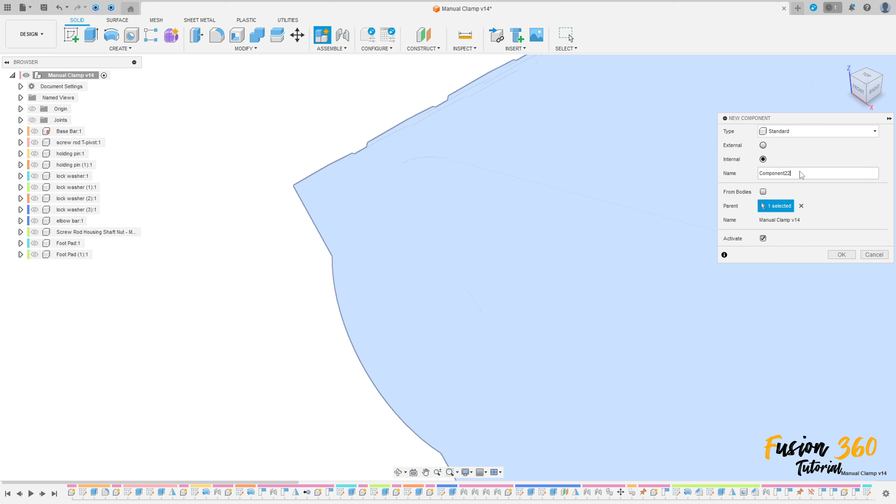Go to assembly, select the new component, rename this to screw rod, press OK.

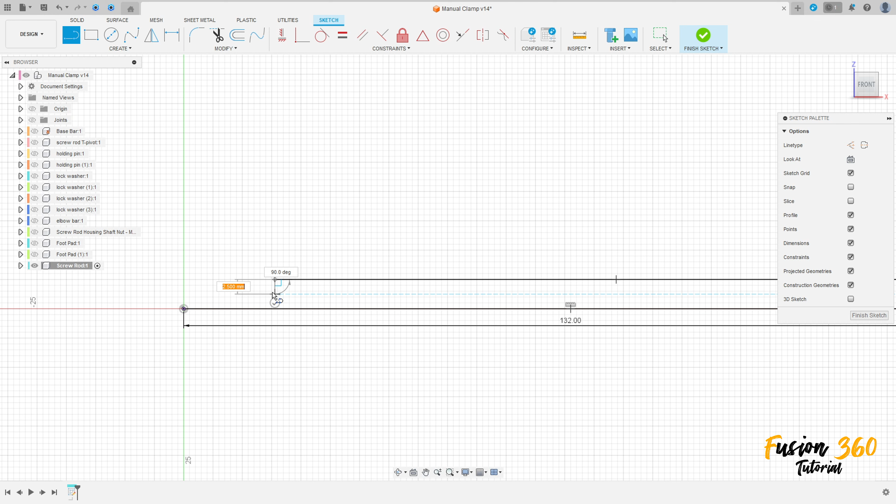Go to create a sketch, select the front plane, select line, make a line here 132 millimeters. Make another line here with 5 millimeters. Make this sketch here.

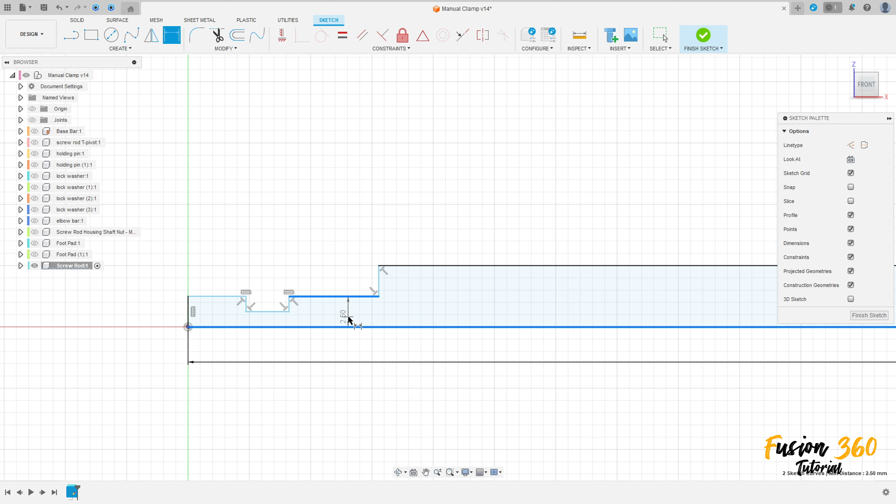Make this line vertical, make this point vertical. Go to sketch dimension. The distance here is 3 millimeters, the distance here is 1 millimeter, the distance between these 2 points here is 15 millimeters, and the distance between these 2 points here is 3 millimeters. And the distance here is 0.5 millimeters.

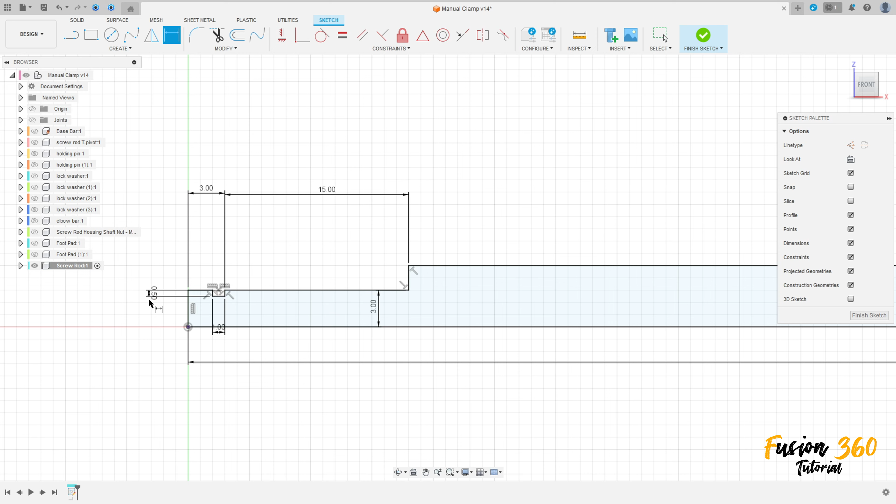We have this. Finish the sketch, go to revolve features. The axis is this line here.

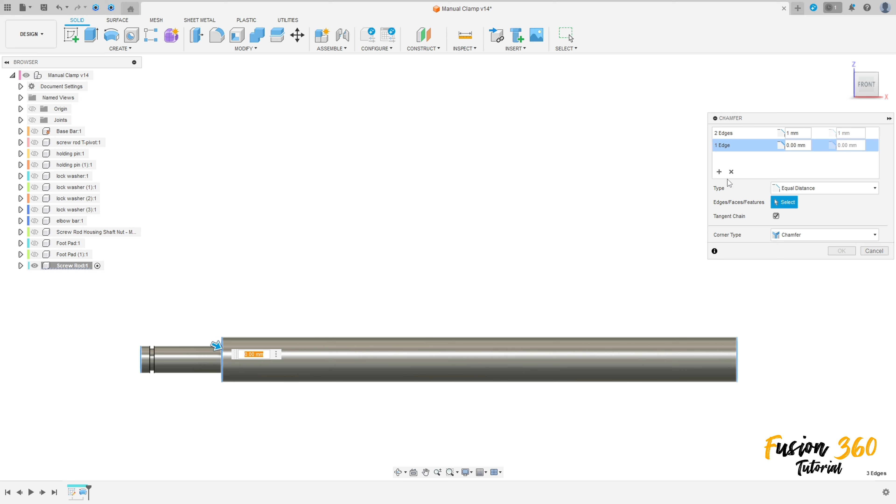Press OK. Go to modify, select the chamfer, select this edge here and this edge here. The chamfer here is 1 millimeter, equal distance. Go to add selection set, select this edge here. The chamfer here is 0.5 millimeters and press OK. We have this.

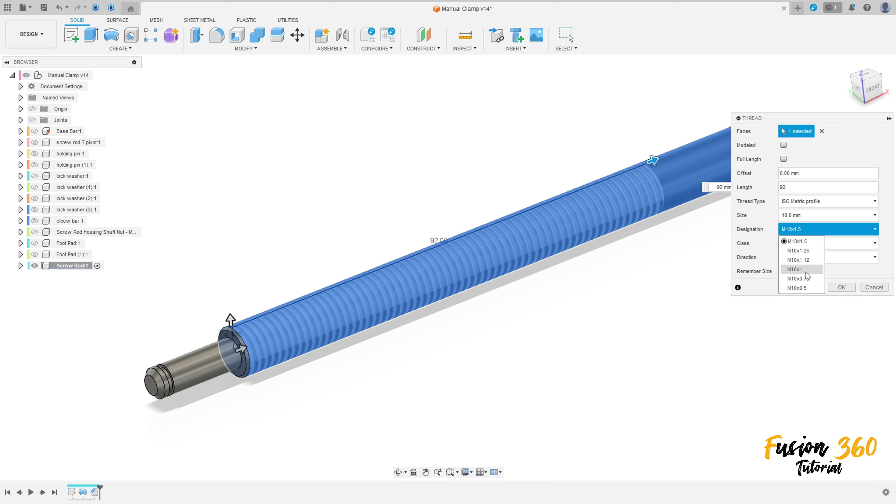Now go to create, select the thread, select this face here and click here, full length. We'll put the distance here 92 millimeters and designation M10X1, and click here, select modeled and press OK. We have this.

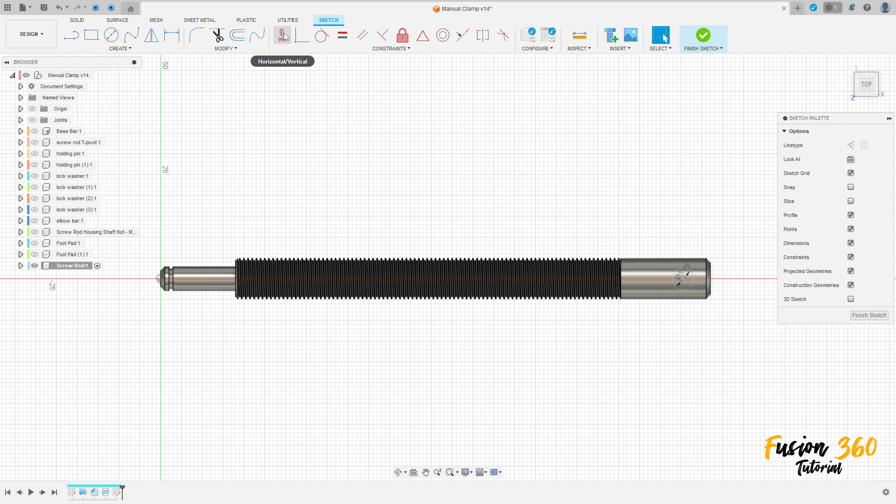Now go to create a sketch, select the top plane and select the circle. Make a circle here with 5.15 millimeters of diameter. Go to constraints, horizontal, vertical, select the midpoint here and the circle. Go to sketch dimension, the distance between this circle and this edge here is 90 millimeters.

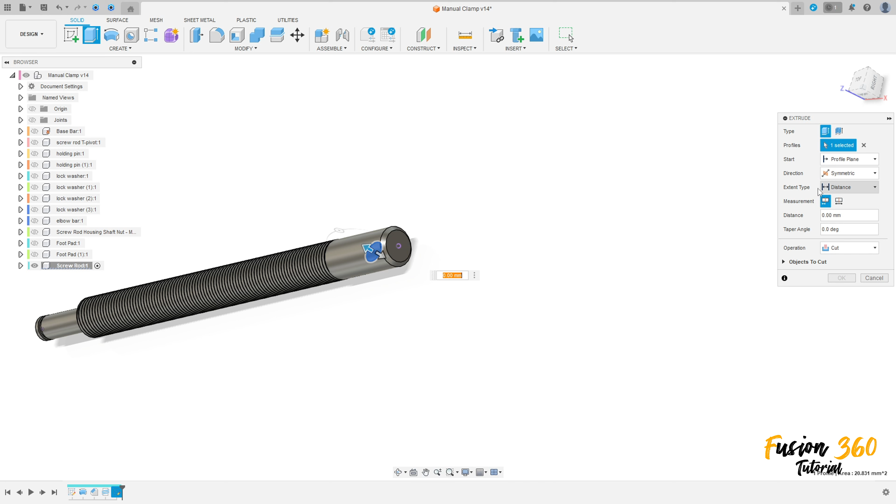Finish the sketch. Go to extrude. The operation here is cut, the direction symmetric and the distance all. Press OK. We have this.

Now go to modify, select the chamfer, select this edge here and select this edge here. The chamfer here is 0.5 millimeters. Press OK. We have this. Show the other component.

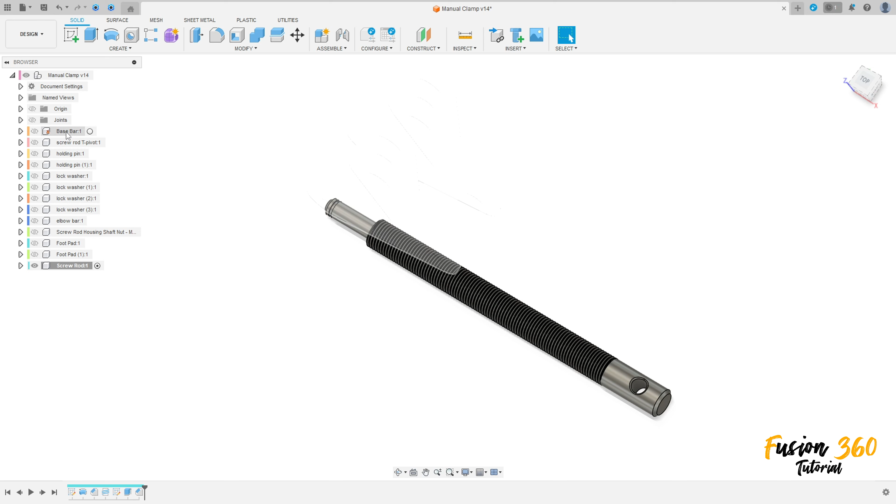Activate the manual clamp. We have this.

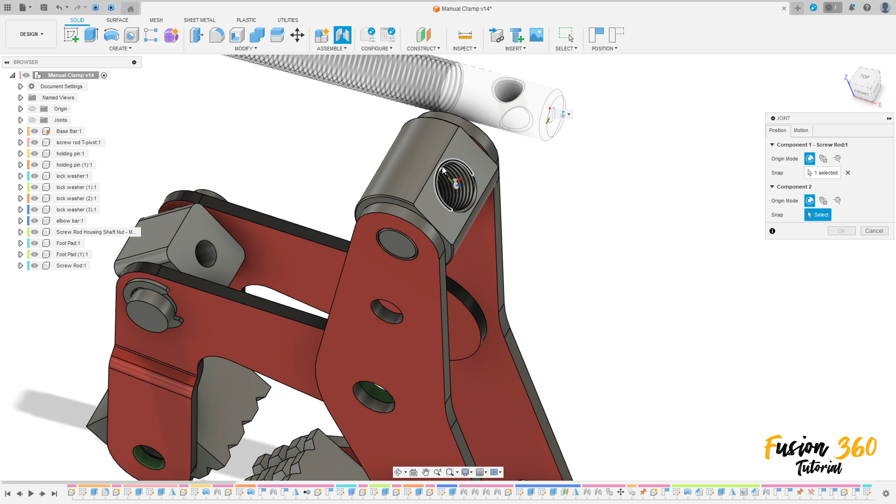Now go to assembly, select the joint, select this edge here, select this edge here. The motion here is cylindrical. The position here, we can move this a little bit here. Press OK.

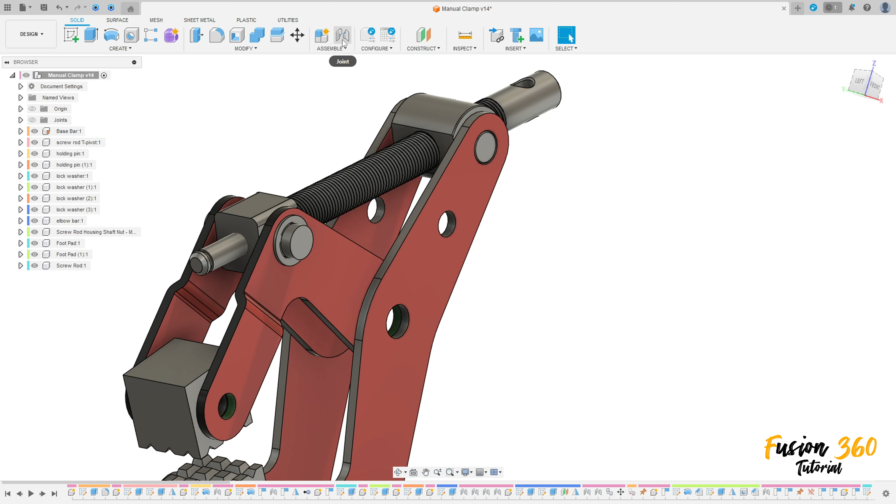Now go to joint again. Select this edge here and select this edge here. The motion here is revolute. Press OK. We have this.

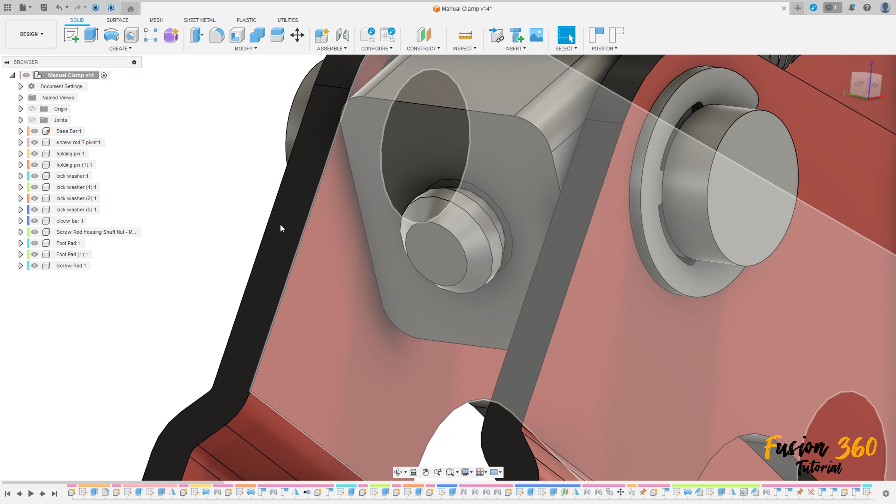We see something wrong here. Let me correct this, the diameter here is different. Let me inspect here 5 millimeters of diameter and here is 6 millimeters. So let's correct this.

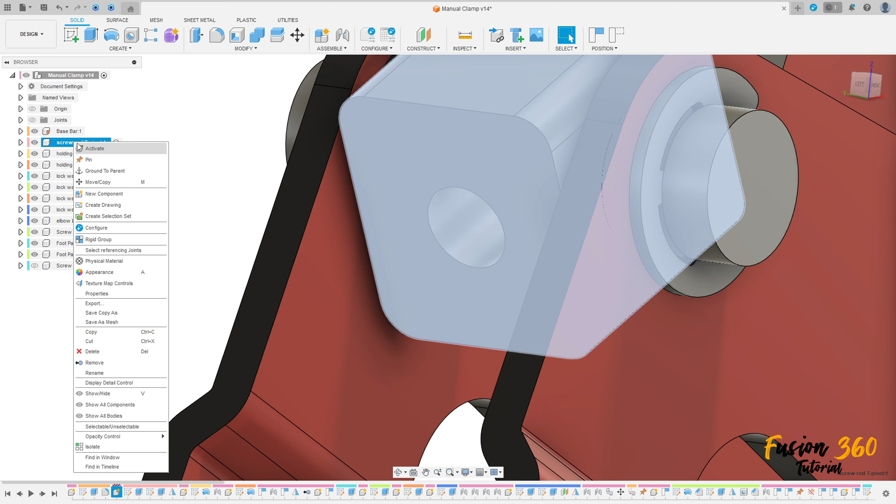Solid here, activate this solid here. Show the sketch. Let's edit this sketch here. The diameter here is 6 millimeters of diameter. Press OK.

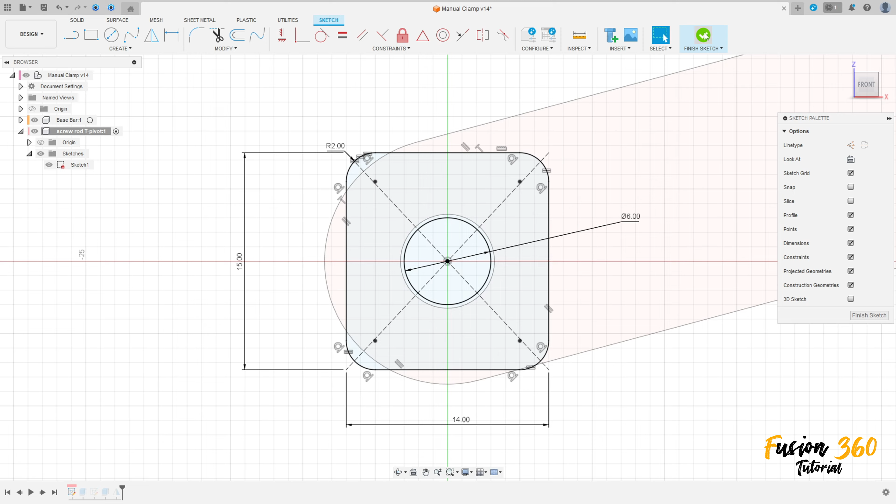Now let's see here, that's okay. Here we finish our exercise. See you in the next video.